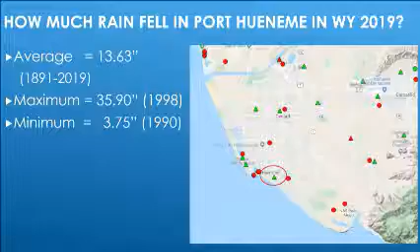And there's some significance watershed-wide there. So this is a good way to start the story for this water year and to just understand water in general in the basin. So I'm just going to have a brief overview of where we get our water and how it affects this year's averages and this year's water supply.

So real quick, this map shows Ventura County and United's service area, in the orange lines. As you can see in the caption off to the right, the watershed area for the Santa Clara River, which is the source of most of the groundwater used in the area, is 1,634 square miles and extends almost out to Palmdale. And even though we only got 16 inches of rainfall here, in an average year, where we get about 13 inches, there's 1.6 million acre feet of water that falls each year in that watershed.

That seems like a lot of water. A lot of folks know that if we could use all the solar power that falls on the planet in a day, we could supply the entire planet for a year. Of course, it's not realistic. You can't cover the entire planet with photovoltaic cells. And when it comes to water, there's no way to capture it all. Most of it evaporates within days or even hours of when it falls. A little bit seeps into the groundwater basins, which will be an important part of our story.

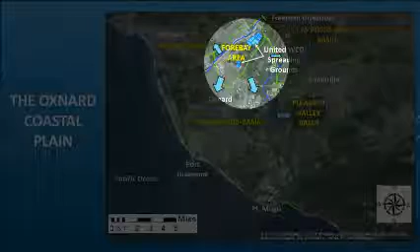Zooming in on the Oxnard Plain, focusing on the Oxnard Subbasin, the Pleasant Valley Basin, and the Forebay. All that water that we divert and recharge into the ground in the Forebay spreading basins spreads outward underground through the aquifers, feeds a lot of wells, and goes to fight against seawater intrusion. And this next map shows, we put in all that water, where does it go?

I have a question. So the method of extraction is both from the groundwater and rain? Is that how they extract the water? So of the water that falls in the region, we divert water from the Santa Clara River into our recharge basins, and then that flows into the aquifers. It's basically like a sandbox. And then all of that water that's taken back out of the aquifers is through wells, pumping wells, groundwater supply wells.

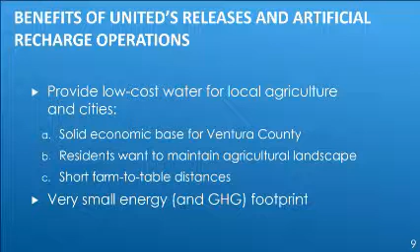And a lot of folks talk about, hey, why don't we just do seawater desal, for example? And that takes about 20 times as much energy as what we do. Not saying that imported water isn't important or that desal may not become important to us in the future, but to the extent that we can take advantage of this natural gift of fresh water falling out of the sky, I think it's beneficial to our environment that we continue to do so.

But there is a downside to what we've done. I mentioned that our community is pumping more water than United is able to recharge. This is a kind of a cartoon cross-sectional view, and where we have these wells, let's see if I can do this. Deep wells are extracting more water than is being recharged, so that means that the water table drops. And the water table has dropped below sea level inland across much of the Oxnard Plain.

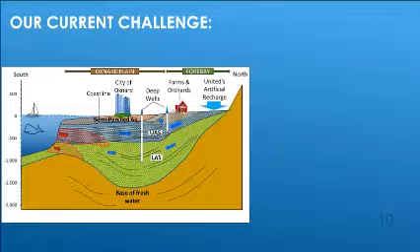And when that happens, what that means is seawater can flow inward. The aquifers outcrop underneath the ocean floor. Seawater can come in and displace all that excess water that we're pumping. And so that's bad news. It hasn't really come that far inland to date, but it's something that we're all concerned about.

And because of that, the state has declared that the Oxnard Basin, which is the basin we're in here in Port Hueneme, and my city, I'm from the big city of Oxnard. I'm a big city slicker. And then Pleasant Valley Basin next door, they're considered in critical overdraft by the state. And I'll touch in a few minutes on why that's so important. The other basins in our area are not considered critically overdrafted.

So this year, finally getting around to this, it took 15 minutes to get here, apologies. I want to talk about our releases this year.

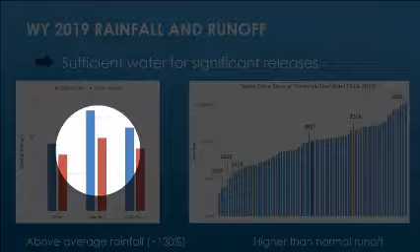This is the first great water year we've had since the big drought. This graph on the left shows at El Rio, north of Oxnard, at Lake Piru, and at Santa Paula, the orange bars show what average rainfall is, and the blue bars, which stick up higher, indicate the rainfall we had in 2019. So good news, about 30% greater rainfall than average.

And flows in the Santa Clara River are shown on the right. 2019 is higher than average flows, maybe the 60th percentile or so. So we had good rainfall, and as you might expect, good flow in the river, that we were able to divert some water from.

Because of that, in the spring, we had excess water stored in Lake Castaic, which we released. We had 19,000 acre feet. At Lake Castaic, we released 19,000 acre feet that we've been building up storage credits there for some time.

Unfortunately for us down here in the Oxnard Plain, almost all that water infiltrated not into Lake Piru, but into Piru Basin, way upstream from here, up around the town of Piru. So it was good for them - they were in pretty dire straits too, but we didn't get much water down here.

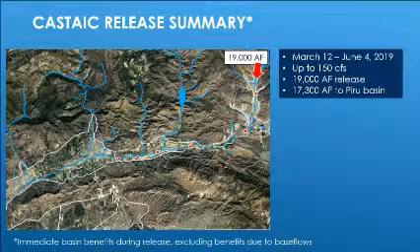So later in the year, this summer, we were able to release 38,000 acre feet from Lake Piru, and that included 15,000 acre feet of water that we purchased from the State Water Project, supported with a grant from the Fox Canyon GMA.

They reimbursed us for 15,000 acre feet of that, to the tune of $3 million. Because the Fox Canyon GMA was paying for that, we really wanted to make sure we got it down here to the Oxnard Plain, and it didn't all just infiltrate into the Fillmore or Piru basins. So we timed it right when the upper river basins were pretty full of water, and we ran a lot of water through there.

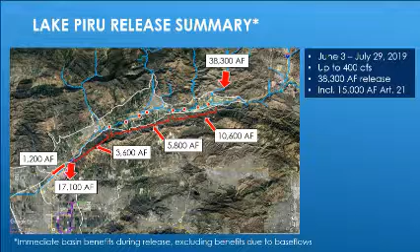Even though some water went into the other basins, like 10,600 into Piru and 5,800 into Fillmore, we were actually able to divert 17,000 acre feet to our spreading grounds in the forebay, basically part of the Oxnard Basin, and another 1,200 acre feet had to go past the Freeman Diversion Dam. We had to let it pass, but it infiltrated into the ground, into the riverbed, also in the forebay. So it all benefited - there were 18,300 acre feet of benefit that occurred to the Oxnard Plain groundwater basin.

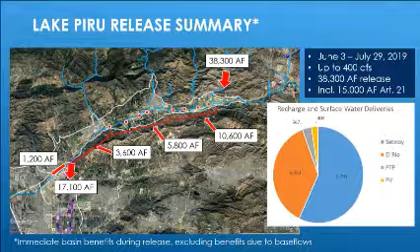And that water flows over into Pleasant Valley Basin. So it's all good, helpful. Sounds really positive. I think I'll just skip this little graph, it's just not that important.

So what that means - it sounds great. The blue line shows how much we divert during an average water year, starting in October at zero, and we just keep diverting more water through the year. During an average water year, we divert about 60,000 acre feet. During the last several years, we should have been able to divert about 60,000 acre feet. Water year 2019 was pretty good, but actually, because of some restrictions on our diversions, it was less - we were able to divert less than we would even during an average year.

So even though it was an above average rainfall year and we had above average flows, we actually ended up only being able to divert a little less than 40,000 acre feet, which is unfortunate. That's the way it goes sometimes. The worst water year on record in our history at Freeman Diversion, we essentially were just able to divert about 1,000 acre feet.

That was 2016, the red line on the graph. And then during 1990, was that '93? My eyes aren't that perfect anymore.

It was a banner water year, and we were able to divert 130,000 acre feet. So we want more years like that. We have to depend on Mother Nature to give us a spectacular year.

The reason we diverted less water than average, even though it was an above average water year, comes down to two factors. First, because the whole state is so dry, water that normally would have flowed down the river during an average water year instead naturally infiltrated into basins that had been dried out by five years of drought. So that was part of it.

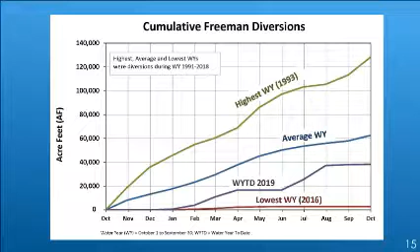But we also had restrictions for fish passage at the Freeman Diversion that limited when and how we could divert. So we're working with NMFS to come up with a new fish passage design that will be good for the fish and also allow us to return to our traditional, historical diversion rates. We think we've got a good compromise that will work for everybody, the people of the plain as well as the fish, so we're moving forward on that.

I'm going to show some complex graphs here. These are hydrographs shown on a map that basically show water level over time, and they illustrate where we stand today in terms of groundwater elevation in the basin.

Remember I said that when groundwater elevations drop below sea level, seawater can pour into the basin. That's bad news, no doubt about it. So we want to try to keep groundwater elevations as high as we can, or at least above sea level.

Sea level in each of these graphs is shown as the zero line, a dark line. Kind of in the middle of the graph, that dark line represents zero, sea level. We want the water level, shown with the blue line, to remain above that.

These graphs go back to 1930 and 1940 in some cases. Generally the levels are above sea level. They commonly dip down to or even below sea level during droughts, but they spend most of their time above. That's what we want to maintain, we want to keep them above.

At the very end of the graph, representing this year, you can see groundwater elevations have started bouncing back up in the forebay, and that's good news. That means groundwater elevations are rising back to where they should be, well above sea level.

I had a question. Yeah.

So when the salt water fuses into the fresh water, does it contaminate the water? How do they take out the salt water that's mixed in with the regular water? Does that happen?

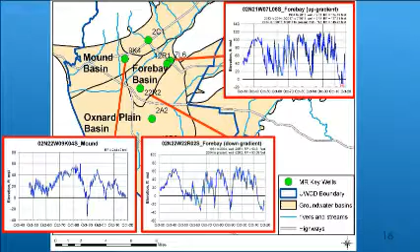In the upper aquifer system, seawater intrusion can move faster inland, but we have less of a problem there. The groundwater elevations are generally high enough to prevent seawater intrusion, except in the worst conditions like we have right now. So the seawater intrusion moves in, groundwater elevations rise back up during wet years, and that pushes the seawater back out towards the coast, that's the concept.

And then I just wanted to show some graphs.

This is farther out on the Oxnard Plain, getting closer towards Oxnard, and it's a little north of Port Hueneme. Two of these wells are in the lower aquifer system, which have the biggest problems. The point of this graph is that the lower aquifer system graphs, the one in the upper right and lower left, show groundwater elevations have been below sea level in those wells, in those aquifers, basically since the 1950s.

So that's where we've had this very slow, steady seawater intrusion that the Fox Canyon GMA is working hard on a plan to reverse. But it's slow, luckily. And to answer your question, Councilmember Rollins, the minute groundwater elevation drops below zero, it's not like it's suddenly displaced by seawater. It takes a long time for the seawater to slowly infiltrate through the aquifer. So it's not an immediate threat when groundwater elevations drop below sea level, but it's indicative of an approaching problem that needs to be resolved.

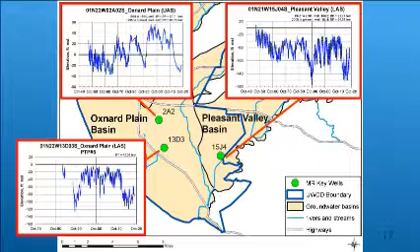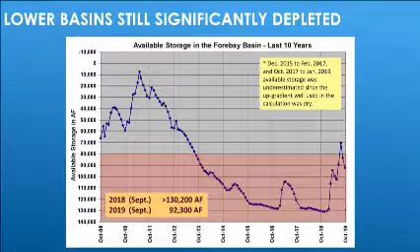So the lower river basins are basically the Oxnard Plain and Pleasant Valley. They're still significantly depleted. We haven't been able to supply them with enough water. This line represents available storage. We basically like to keep groundwater elevations high enough that we're out of the red, which represents groundwater elevations below sea level. You can see at the very right side of the graph, in 2019, we were able to bring groundwater elevations up quite a bit, but it was just above the red zone, and now it's dropped back in. So it's a good thing that we were able to deliver the amount of water that we did, but was it enough? Not quite yet. We're going to need a few more wet years to really get things back to where they need to be.

And you attribute that to increased usage, or what do you attribute that to?

Yeah, so partly it's that we haven't had water to divert in the last five years of the drought, or very little water to divert during the drought, and that's a normal cycle you can live with. The other thing that happens during these droughts, when we don't have surface water to deliver, is that means people are more dependent on groundwater.

So during a drought, there's a couple of things going on. There's no rainfall falling, so people have to apply more water from other sources to crops, and they don't have any other sources. So then they pump groundwater even harder. I've got a couple graphs here that'll show, I think, that people are doing a lot to help alleviate that problem, but there's no way around the fact that when there's no other sources of water, we have to pump groundwater a little harder.

But during the drought, they were higher. When we were able to add that 15,000 acre-feet plus of water from Lake Piru in the mid-2019 period, you can see those nitrate levels dropping from about 35 milligrams per liter down almost back to the average. Unfortunately, they started coming back up, but once we can get more water in there, we can dilute nitrate, which is healthier for everybody, and it'll be good when we can get more water going.

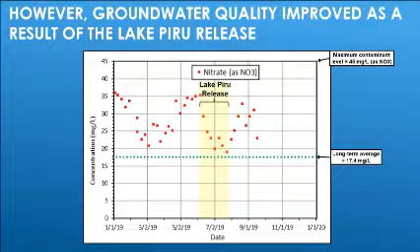The nitrate concentrations have not risen up to the old levels of 35 milligrams per liter or higher that we had during the worst part of the drought. Now that we're entering winter, hopefully we can keep them lower and knock them back even farther.

So to summarize this section of the talk, for water year 2019, I just want to say we had an above average year for rainfall and runoff, or surface flows.

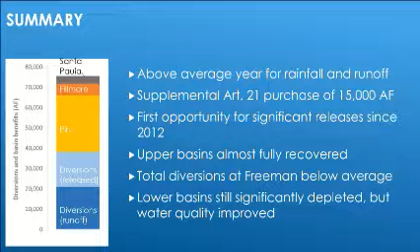Our supplemental purchase of water, that state water project water from Article 21, which was very inexpensive at $200 an acre foot, allowed us to discharge or divert 15,000 acre feet into the area of the OH well field in the Pleasant Valley. That was our first opportunity for significant releases since 2012. Even though our upper basins are almost fully recovered, our area is still below average, still significantly depleted, and we need to keep working on that.

And finally, for my part of this, before I let Robert up here, what does the future hold? I'll just touch on a couple things here.

This graph shows current reservoir conditions throughout the state, and we're in pretty good conditions right now. Most of the reservoirs in California, for the first time in 5 years, have either average or even above average storage, or they're full of water. They don't have available storage. They're nearly full, like Shasta and Oroville and some of the others. So great news on that front.

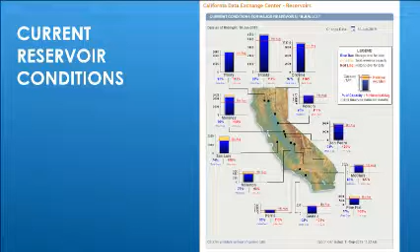We're hopeful that we can potentially purchase more of that really cheap Article 21 water this winter, and maybe get water from some of our neighbors. A lot of agencies around us, like Santa Clarita Valley, have more water than they can use. If we can purchase some of their water, we'll try to divert some of it down here to the Pleasant Valley.

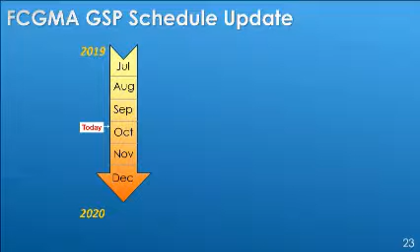Some of you may be aware of the Fox Canyon GMA working on groundwater sustainability plans, or GSPs, including one for the Oxnard Basin. This is timely.

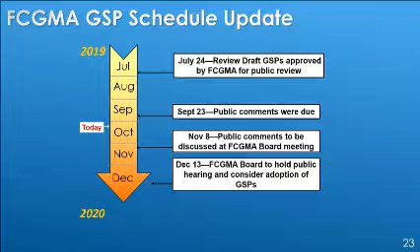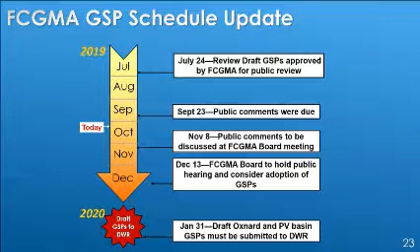On July 24th, they released review draft GSPs for public review. Public comments were due on the 23rd, and quite a few folks submitted comments. November 8th, the Fox Canyon GMA will discuss those public comments at their board meeting and how they're going to respond to them, figuring out what they want to do. On December 13th, the GMA board is going to consider adoption of those GSPs. Hopefully they'll make a few revisions or improvements between November 8th and December 13th. But the bottom line is they have to submit groundwater sustainability plans to DWR, the Department of Water Resources, by January 31st. That's an absolute drop-dead date, so that's what they're working towards.

I have a couple more quick slides here to describe the situation in terms of the groundwater sustainability plans.

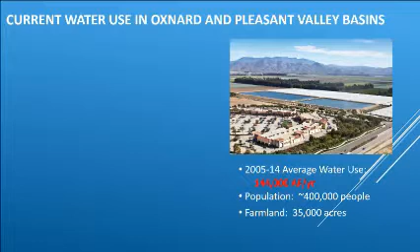In 2015, they based their groundwater sustainability plans on usage averaged from 2005 to 2014. Our region, Oxnard Plain Basin and Pleasant Valley Basin combined, used about 144,000 acre feet of water during that period. Now, some of that was imported state water project water, not groundwater, but a whole lot of it was groundwater. Of course, that's supplying 400,000 people plus 35,000 acres of farmland.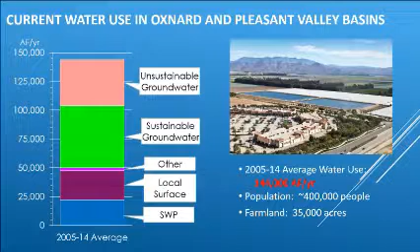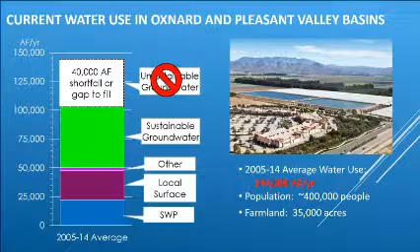Sustainable groundwater provides the bulk of our water supply, but we're pumping a little bit beyond what's sustainable. So my graph is intended to show that some of the groundwater we're pumping is unsustainable. Presumably this GSP is going to say you can't continue to pump that 40,000 acre feet of water, so we're probably going to have a 40,000 acre foot shortfall or gap that needs to be filled. I think that's what's going to come out of the Fox Canyon GMA's process. In fact, that's what their plans specifically state.

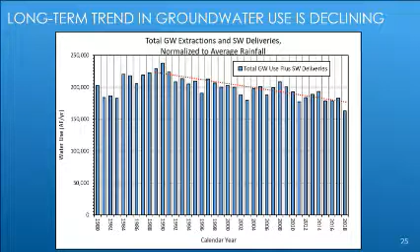On the plus side, this graph shows total water use since 1980 for that same region, Pleasant Valley and Oxnard basins, and there's a positive story here. If you normalized it, if every year was an average rainfall year, this is what people's water use would look like total, combined agriculture and M&I, municipal and industrial use. You can see we've been on this downward trend since roughly 1992 that looks really good. People are using less and less water.

So our population increased 100,000 people from 1980. Water use stayed stable, and actually in the last 12 years, we're using 10,000 acre feet per year less water for M&I purposes today than we were just 12 years ago. So good on the cities.

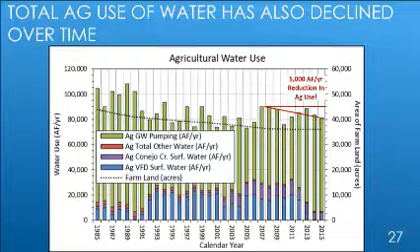And for what it's worth, agriculture shows a similar overall long-term trend of declining water use. In the last 12 years, it looks like they're using about 5,000 acre feet per year less water. So good news. And the other good news I just wanted to touch on real quick before I let Robert go, I'm going to show the Oxnard Plain.

These are the water projects proposed in the Fox Canyon GMA's groundwater sustainability plan for the different basins up there in West Las Posas. They want to bring in more imported state water project water in Pleasant Valley Basin next door. They want to do some fallowing. Of course, agriculture is not super thrilled about that. Here in the Oxnard Basin, they also have proposed about 500 acre feet per year of fallowing.

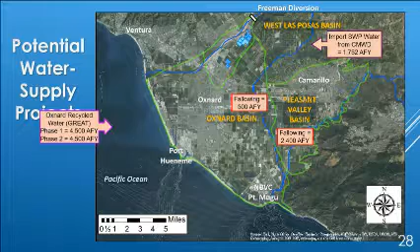Oxnard's got some recycled water they want to apply. That could bring up our supplies by 9,000 acre feet. And we at United want to expand our Freeman diversion so we can bring in an additional 5,000 acre feet of water per year. Now, you may recall I said we have a 40,000 acre foot per year shortfall, so this doesn't quite make up for that.

Other people have projects. Ventura is going to bring in water with their state water project interconnection. And United would like to propose some more projects moving pumping away from the coast where the seawater intrusion is worse. That should increase the sustainable yield by a couple thousand acre feet.

We are working on design of a brackish water treatment plant. That's water that's a mix of salt water and fresh water, so not quite as energy intensive as seawater desal. It also builds a barrier to seawater intrusion. That could add 15,000 acre feet to our supply.

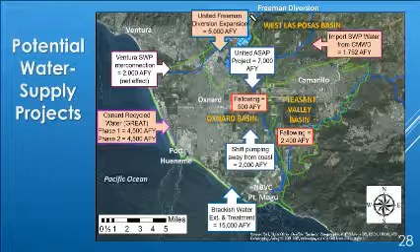And then we have another project we call ASAP, which involves a direct pipeline from Lake Piru and purchasing some more water from our neighbors that could bring in another 7,000 acre feet. So that 40,000 acre feet per year shortfall that we're all afraid of, well, between conservation and these projects, we're hopeful that by the time we have to be sustainable in 2040, we can actually be there. We'll have projects to supply it and people will be conserving water.

And I'm going to leave before I let Robert up here with a quote from John F. Kennedy: the time to repair the roof is when the sun is shining. I'm actually hoping for rainy weather. But yeah, even if it rains, and we start getting all this water supply again like United's used to, let's not forget that we need to keep building projects because droughts are going to return.

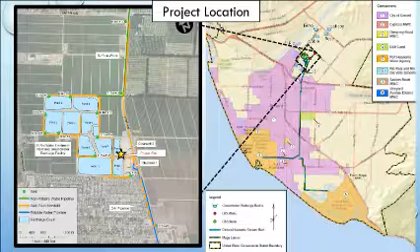Part of the reason this site was selected back in the 50s is that it had great recharge capabilities, and United had a purpose, which was to move pumping inland and to help mitigate the effects of seawater intrusion.

So the El Rio water treatment plant consists of 12 wells, 9 in the upper aquifer system and 3 in the lower aquifer system. It is essentially a slow sand filtration system, so most of the wells have a sanitary seal that goes down 100 feet. And we disinfect with chlorine, and we add ammonia to match chloramines that's present in the State Water Project water.

We have a booster system that can produce up to 32,000 GPM. We have both electric and natural gas. Natural gas is available in the event of emergency. And our pipeline is about 12 miles long. It goes from 42 inches down to 24 inches. And we have a pipeline capacity of about 23 or 24,000 GPM.

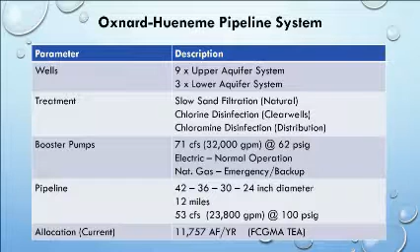The current allocation for the system is about 12,000 acre-feet per year, and that's through Fox Canyon GMA temporary extraction allocation ordinance. So real quick to define the project. So in times of drought, we experience increasing nitrate concentrations in our upper aquifer system wells. And that poses a challenge for us to deliver water that meets all the drinking water standards.

We prefer to use the upper aquifer system wells as much as possible because they are less expensive to operate. They require less energy to extract water. But they are sensitive to droughts. And so during droughts, we leverage our lower aquifer system wells. But these wells have iron and manganese contamination that's naturally occurring.

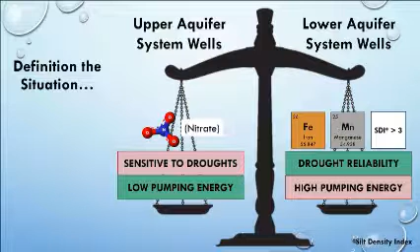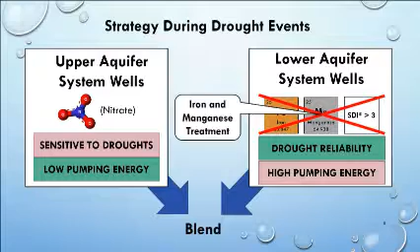They also have an issue with a high silt density index, which creates problems for the downstream brackish water treatment plant system that Port Hueneme Water Agency operates. But the fact of these wells is that they are extremely reliable during droughts, but they are more expensive to operate. So what's our strategy during drought events? To eliminate the iron and manganese in the lower aquifer system by building treatment and blending with our upper aquifer system to help reduce the cost of energy to deliver water.

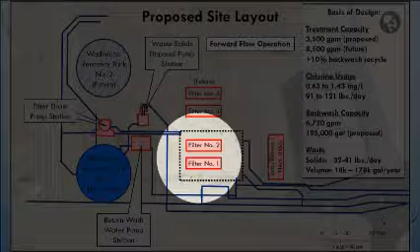I apologize, we were here in April, so this might be kind of revisiting what you already saw in the presentation. But today we have a new site layout. Currently the system as it stands, we have a 3,500 GPM system that consists of 2 filter vessels. We could expand up to 8,500 GPM, which is the full capacity of our 3 lower aquifer system wells.

And that system will, let's see. As we put raw water into these filter vessels, we'll hit it with chlorine, and that will oxidize and be removed by the filters. And we'll also be, and I'll talk about this in a minute, recycling some of the decant from our backwash tank and blending that with the raw processed water.

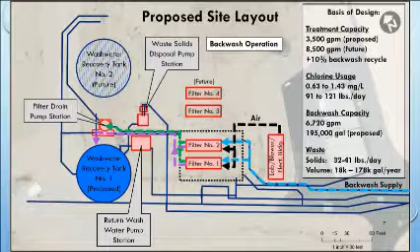Our backwash operation, we start by draining the filter vessels. This is something that we learned in pilot testing to improve the operation, is that we needed air scour to help loosen up the media, extend the media life, and help in the removal of accumulated solids. And we'll be using our own water to backwash the filter vessels, so that's chloraminated water. And the backwash water will end up in the wash water recovery tank.

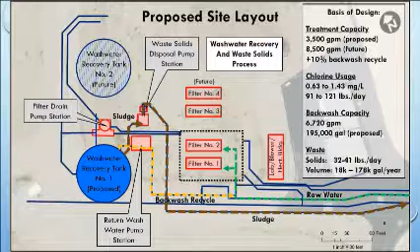So on the wash water recovery, we'll have a 195,000 gallon tank where we will be able to decant the water. We'll again recycle it back into the process. This is anywhere from 0.5% to 1.5% of the actual flow into the treatment plant. And we are still working on sludge removal options, whether we send that to the sewer or whether we haul that off-site. But we will have about 32 to 41 pounds a day of sludge to deal with. These are concentrated metals that exist within the lower aquifer system.

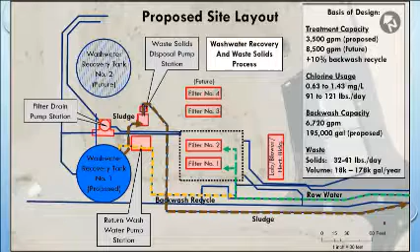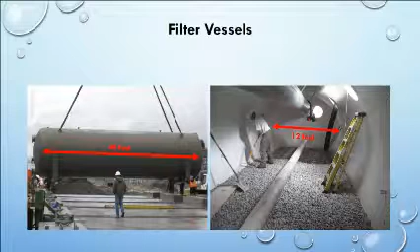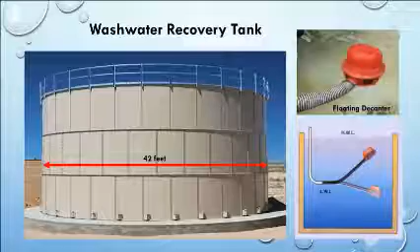So where have we been and where are we going? So in February and April of 2016, we kicked off the project with our Oxnard-Hueneme user meetings. We also started our pilot plant. Layne Christensen operated that. That was a GreensandPlus and LayneOx system, and we were able to demonstrate the capabilities of both medias, and we selected a media at that time.

We also completed the feasibility study in 2016, submitted this to all the users. And then there was a little bit of a gap as the OH users agreement was being renegotiated. And as those discussions closed, in 2018, we continued this process with more users meetings. We hired a design consultant, Kennedy Jenks, in July 2018. At which point we conducted another pilot study, and that was to characterize the sludge that's generated from the plant.

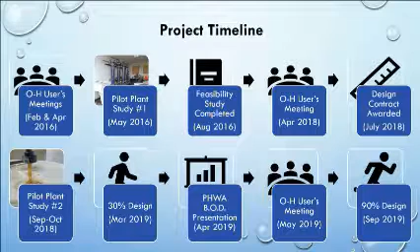In March 2019, this was right before we made our first presentation to your board, we completed the 30% design, which is what our current budget is based on. And we had another OH user meeting, and currently today we are at the 90% design level. And on my desk right now is about 100 sheets of plans and about 1,000 pages of specifications. So we're spending time to make sure that this is going to be a quality product and a quality plant, and we're spending time to make sure it's right.

We're also spending time working on funding. So the 30% design was $5.7 million. We're currently working on the 90% design estimate. And we did secure a grant through the Bureau of Reclamation in the amount of $300,000 under the 2018 WaterSMART program. We're currently working on a $2.5 million application with DWR's Integrated Regional Water Management Grant Program. That's through Watershed Coalition of Ventura County. We have been shortlisted with 4 other projects, and so we're optimistic about that. We might also explore Drinking Water State Revolving Fund.

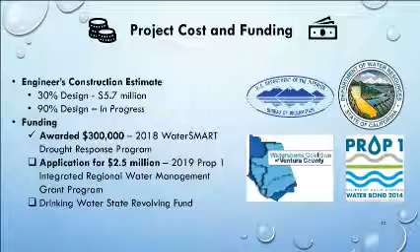So again, as I mentioned, we're at 90% design, and we plan to have a final package by the end of this year. We could have completed it sooner, but we are waiting on funding, and the applications for the IRWMP process are due December 6th, with awards expected to be announced in spring of 2020. So we can't start construction without finding out what the results are from that process. We also completed all the geotech work. We are working on CEQA NEPA. Right now, the determination, which is supported by our consultant, is that the project is exempt under categorical exemption.

What's interesting to know is that John mentioned energy usage, and one of the criteria that DWR uses is climate change impacts. And so we know that the State Water Project water has been reported to be about 3,250 kilowatt hours per acre foot delivered to the county. Our system is anywhere from 250 to 500, depending on what wells we're blending. So it is a much more cost-effective system. And with that, are there any questions?

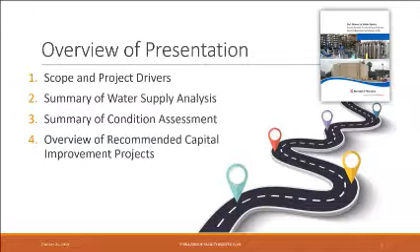So real quickly, what I'm going to go over in the next 10 to 12 minutes is the overview of the project drivers, what led us down this path, why we went through a condition assessment and master plan, to give the board a little bit of background, and then I'll overview the key pieces of the final results. So the first one is project drivers.

Specifically for PHWA, there were a few that are very timely, we heard about today. You can see that first one, that's SGMA uncertainty. With the changing water supply conditions in the county, there's going to be a reduction in the amount of groundwater that's available to PHWA. It was the foresight of the board back in 2017, seeing this coming down the road, they wanted to be prepared for what that was going to do to the cost of operating the facility and to understand clearly what the picture is. How much water are we short? What's the total dollar amount? Should we invest? And so they saw the need for doing this master plan.

There are also a few other drivers that are typical for any master plan. You do have an aging facility. We're over 20 years old, so there's going to be a need for capital rehab and replacement. Budget planning is another key driver. It's important when you're looking at your rates to understand what the total cost of this investment is.

Staff transitions. This is not something unique to PHWA. This is something all agencies are facing across Southern California. There are retirements, it's difficult to get staff, and so you see this turnover. A master plan can really give you that consistency as you move through staff transitions. And the last one was opportunities to improve. A lot of what's in this master plan is actually not repair and rehab. It's actually optimization. So that's a good thing. That's going to lower your cost to operate.

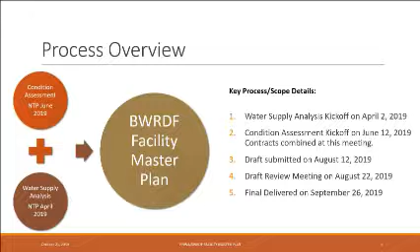This is just an overview of the process. In general, we started with a condition assessment and a water supply analysis. Those were two separate tasks. The staff made a really great point that these are the two major pieces of a master plan. So we went ahead and combined them so that you had this tool you could utilize going forward. And there's the general overview of the schedule. It's about a 6-month process.

These are the key elements of the facility master plan. It starts with the facility background, which I'll give a little more detail on. This is really important because the agency did not have a master plan to date. So there isn't a single document you could hand to a new staff person, say your new water general manager or a new city manager, that they could read through and really understand where the plant is and what the needs are. The next two pieces, the water supply and condition assessment, were those individual efforts I talked about earlier that we had combined.

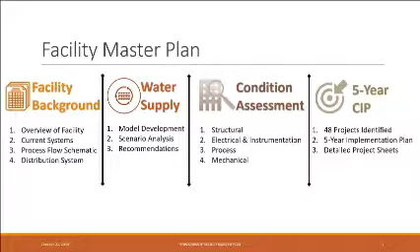Water supply is self-explanatory, and so is condition assessment. Those get combined into the 5-year CIP. This is really the piece that's going to plug into your budget and give that game plan to the staff to start implementing projects.

So on the facility background, as I mentioned, the importance is to have this baseline. You can see there were a number of figures we put together that help explain how the process works and what infrastructure is actually out there that PHWA is utilizing to meet the service needs of its member agencies. These were not documents that were easily accessible before, so we constructed these from as-builts that had been accruing over a period of time.

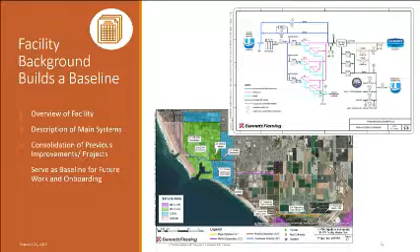So these are really valuable. As an engineer, we love picking up documents like this because we can quickly understand what the issues are.

This Excel-based model allows the PHWA, as your conditions change, as your water supply changes, as grants come in and we start to understand what the true cost of the iron and manganese projects we heard about, you can plug those numbers into this model and see how it impacts your available water supply, how it impacts your total cost of water. And now you can actually look at scenarios in real time.

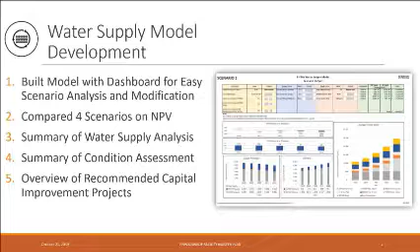Specifically for this, we used $125 per acre foot for the iron and manganese project. We just heard today that 50% of those costs may come from grants. So now we can slide back 125 to say 90 and see what that does. It's going to be a really helpful tool.

Finally, as we started to plug in some different scenarios just as a starting point, we got a lot of information back from the model. This is the table that came out of that analysis, and I'll just give you the highlights.

Basically, the groundwater supply, we're going to be at a deficit. To operate how we currently do today, we won't be able to sustain that operation. The amount of groundwater we use versus import water is going to have to change because our groundwater supplies are going down, and you can see what that shortfall is. By 25 years, you're talking about 2,000 to 2,900.

And what that's going to mean is we're going to have to use more imported water, which means costs go up. We looked at some different scenarios and found, to summarize as quick as possible, we're going to have a short-term increase in groundwater. That's what's going to happen through the GSP.

So what we want to do is look at ways that we can increase in the short term our use of groundwater, because that's our cheapest source of supply for PHWA. There are some projects that outlined some simple ways to do that.

And then for long term, what this analysis showed us is if you look at the difference between scenario 1 and scenario 4, those are the exact same demands. But for scenario 4, we showed that you could do an investment of $10 million and increase your recovery, meaning you're decreasing the amount of water you're sending to your brine.

And what that allows you to do is actually lower your overall net present value, meaning it's a better investment in the long term to spend money up front but increase your efficiency at the plant.

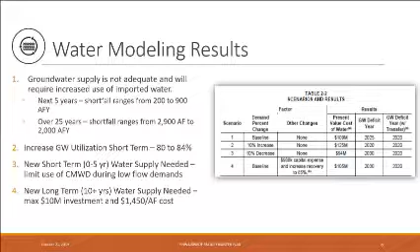So that's the kind of scenarios we can look at with this model. It helps us to guide our investment going forward, and it can tell us, yes, this investment makes sense if it delivers X amount of efficiency.

Condition assessment results: we had structural, electrical, instrumentation, process, and mechanical engineers all come to the site. We did an all-day visit and documented about 50 projects.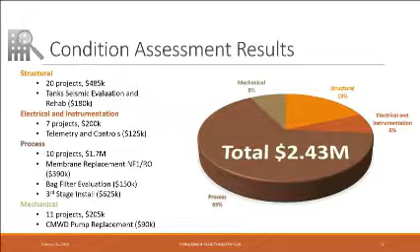In the capital improvement plan, we then broke that $2.43 million and put it over 5 years. You can see year 1 and year 2 are really the priority projects. These are the ones we talked with staff about, the ones that have an impact if you need to start now, essentially.

I mentioned the benefit of capturing more groundwater in these initial years, so those projects were prioritized.

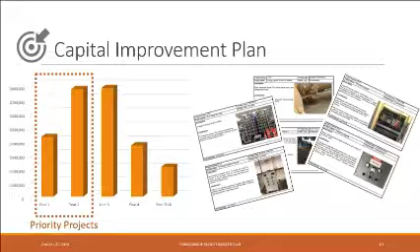And then we developed these project sheets that have a photo, a description, a justification. It gives the staff the ability to understand what the project is and be able to move quickly into it because the information they need to do so is there.

These are just some of the detailed projects. If we had time, I was going to walk through these. I do want to point out a couple because some are optimization and some are rehab.

You can see P3 there under year 1, that's membrane replacement. The membranes are essentially failed, you're not even operating one of your skids. We talked about fouling, are they at the end of their useful life? They're well beyond it. You got quite a bit of mileage out of those, about twice. I mean, you're running 20 years, typically you'd see 10 years. But the water's really clean that you're treating, so you would expect a little bit more, but yes, you've gotten your useful life plus some.

The hydraulic analysis is one where we may be able to lower the cost of operation, so that's a helpful study. The arc flash is a safety issue. Removing the fluoride system, this is something that we talked about with the member agencies, this could reduce cost right away. So just wanted to give you a flavor that there are projects here that can reduce your operating costs. They're not all just rehab.

And then finally, the next steps. So you've got the final master plan. I believe we sent the hard copies over so you can distribute those amongst the member agencies. You'd want to take those projects. Obviously, there may be some fine-tuning as you proceed down into the details year by year, but you've got the projects and the budgets to start with, so you'd want to work that into the budget.

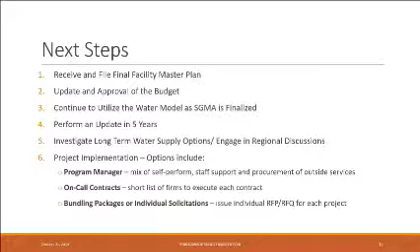All right, let's see if there are any questions from the board. Any questions? Yes. Thank you for a quick run-through of a great deal of information.

You did a great job trying to keep it under the time frame. I think this is important for PHWA going forward, and I really appreciate the final slide here, in that we know that there's going to be some staff transition. We'll miss you, Rod, but I appreciate the comment about consistency and not letting the work and the investment that's gone down here go away. So I would like to see us, if there's some way today for us to at least give staff some direction as to how we keep this moving forward without making the ultimate commitment, because I still have some questions and would like a chance to study.

This was pretty quickly run through, and as Ryan mentioned in the presentation we saw earlier today, if the iron and manganese facility is built, my assumption is your guys' evaluation on efficiency may not have taken into account what the water quality may or may not be.

After that, we can all make some decisions knowing there may be some increased water quality on the OH pipeline. Our plant today, operating 100% efficient, if it produces 3 million gallons of water a day, throws 1 million gallons of water away to produce that. Is there some way for us to look at what water quality we want to send out to our constituents? That speaks directly to the supply shortage referenced in this.

So I think we have some questions we could answer, some policy-wide decisions for one another, but certainly we don't need to hold up a process of engaging, asking staff to reach out and maybe bring us a program manager, or a combination of a program manager and someone who's going to handle making sure this moves forward with board direction in it.